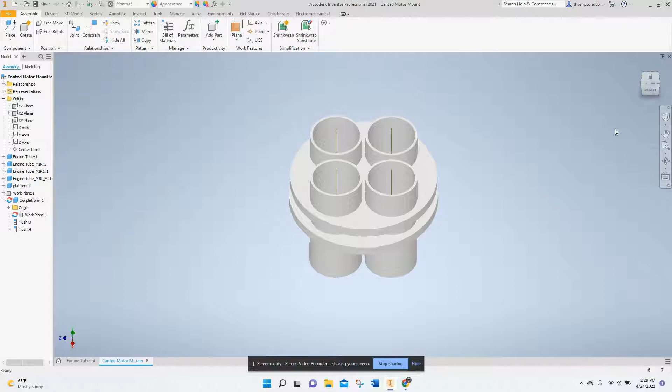Good afternoon, everyone. Today I'm going to show you how to construct your canted or non-canted engine mount.

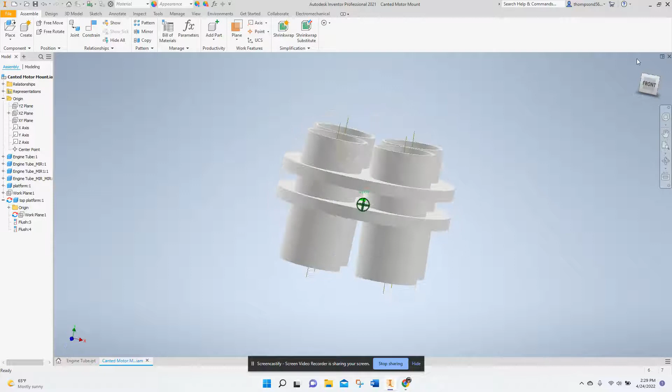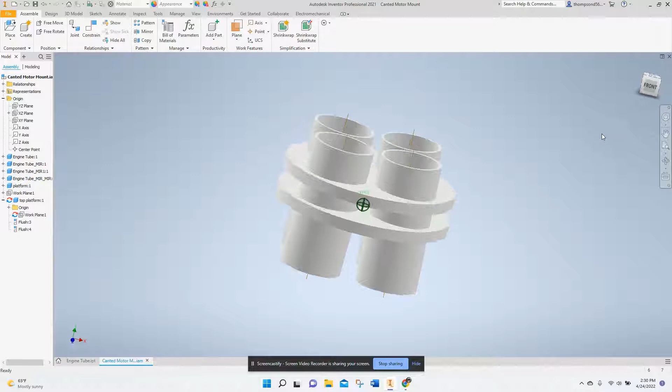This is just one potential layout. Yours doesn't have to look like this one. Notice these motors are canted in this direction, and my two platforms are kept close together, though they could be spread out as far as you want, and spreading out is probably better than close together. But in this case, I wanted the majority of my rocket motors outside of my rocket, which can have the advantage of being a bit more stable with the center of pressure lower. But it also increases the size of the fins, because they have to be up off the ground in order to launch. So, just one possible configuration.

You can create yours in any configuration you want, using basically the same steps.

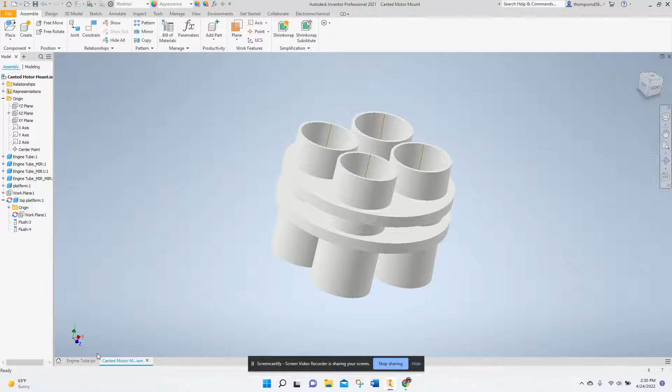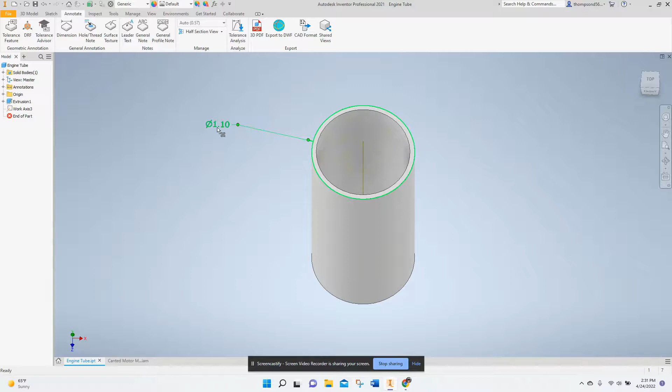I've already created my engine tube as a part. Notice it's completely hollow. I made sure it was 1.1 inches wide on the external diameter. To double check your measurement, you can add a dimension on the outside circle and make sure it's 1.1. The internal dimension I used was 1 inch, so my wall thickness is about 0.05 inch. That's how you can double check and make sure it's the right diameter.

I'm going to get rid of that so it's not in the way. You're going to open up a new assembly: file, new, and then click on assembly.

You're going to want to place your rocket engine tube so that it's symmetrical. I'm going to flip over my view cube so it says top, then go to the side panel and make some of my planes visible so I can see where the origin is and place my tubes in symmetry around the origin.

So I'm going to place the first tube. I'll go to place, and I named it engine tube, so I'll look for engine tube and open that. In this case, I'm going to place it right in the middle. Oh, I need to zoom in a little bit because it's not letting me exactly place it in the middle.

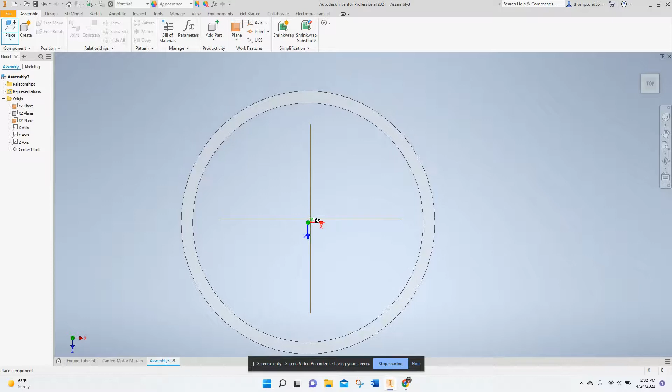Why not? No, I'm going to place it and then move it. All right, then I'm going to escape because I'm only going to place one at this point in time. I'm going to edit this one so I have it exactly in the middle.

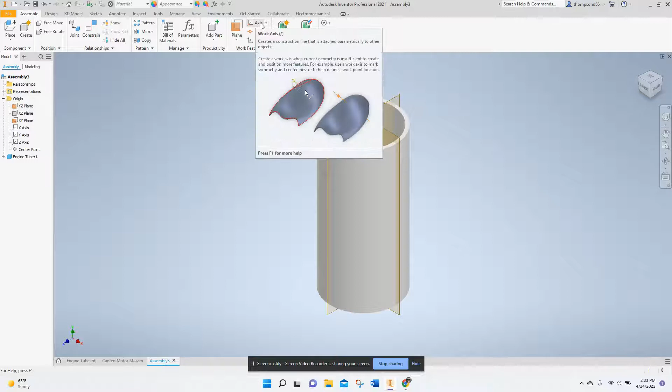Now, notice I kind of eyeballed it. There's a way to add an axis to help you with placing things. If we go over here... actually we can do it in assembly. See this toolbar that says axis? You can click that, and notice I highlight the work axis here in the very center of the tube, and I can place that work axis there.

Now, when I look at this, I guess it's easier to see from an angle, I can make sure that axis is right in the middle of where those planes are. So it helps with lining things up.

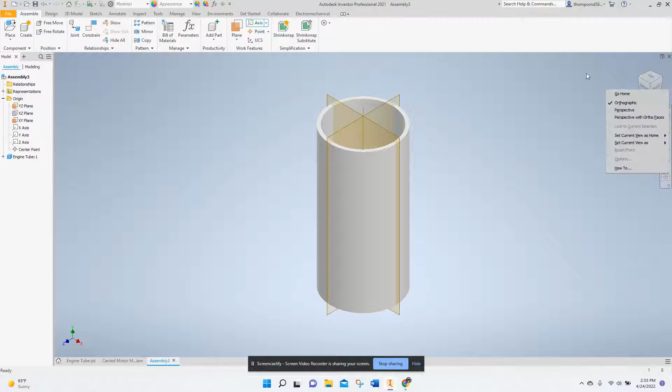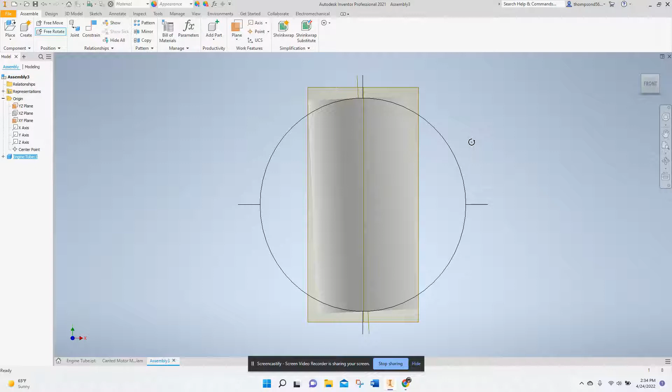Also, if I go to cant this, if I change it... if I'm looking at it from the front and I want to free rotate this motor mount so it's canted, I can look at the difference between my axes and my free rotate, and that gives you a little visual of exactly how far you're rotating the engine mount. So I'm going to undo that, because this one I don't want rotated.

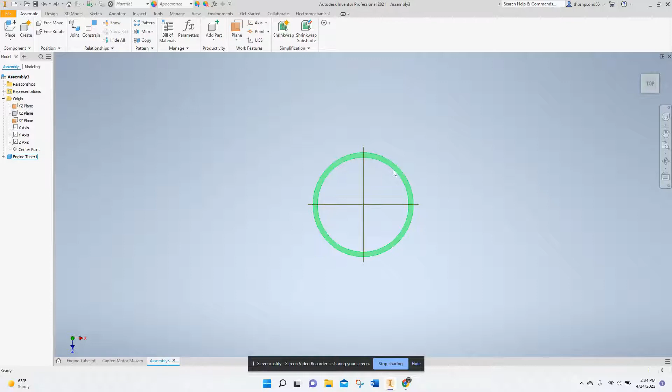And I'm going to go back up to the top view, and you can see this one's right in the middle. Now, let's say you decided you wanted the version with one in the middle and three around the outside edge. Now that I've got this one in the middle, I can place the other engine tubes around it.

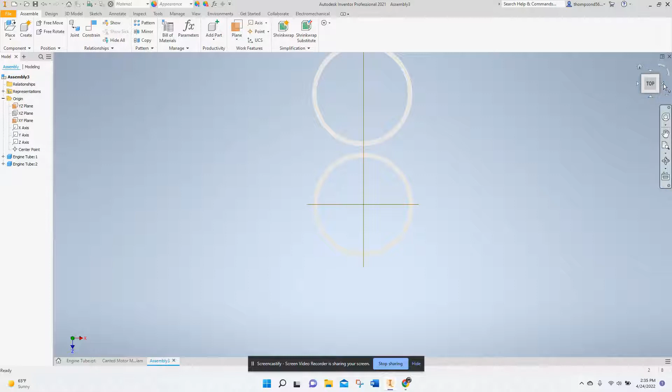So I'm going to place this one to the top, and then I'm going to cant this one just to show you how to cant it. I'm going to look at this from the side, and remember, you want the top facing in and the bottom facing out.

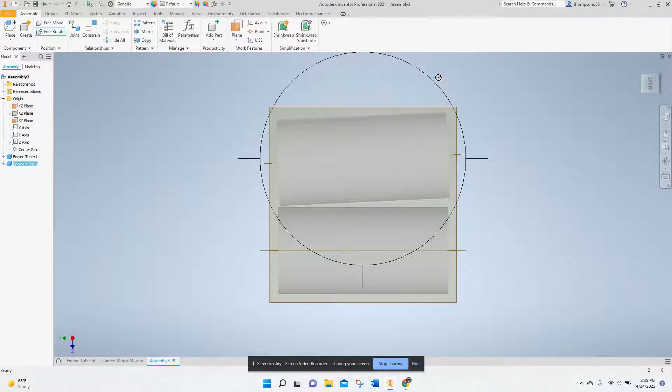So I'm going to free rotate this one. I want it canted just a little bit into the top. Then I'm going to free move this one so that inside edge is about the same as the center one.

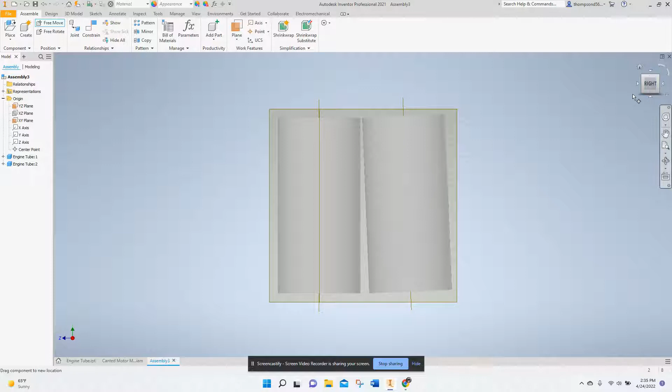Okay, then I'm going to look at this back from the top again. Notice that this one is slightly canted in. All right, so now I'm looking at it from the top.

There's a way to copy objects -- we've used mirror before, but there's also a way to do it in a pattern. So this time we're going to do it in a pattern, and pick the component we want to copy. Then we're going to select this circle pattern -- we don't want a square pattern, we want a circle pattern.

We want it to rotate around a point, and that point is the center point here. If it lets me choose the center point -- it's not. So I'm just going to click the center point here. Maybe not. Why is it not letting me select that base point?

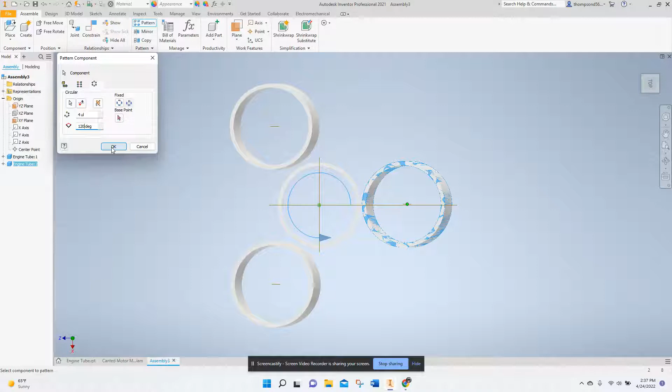There we go. Now this is making 4 of them, but I don't want 4 at 90 degrees, I want 3. So if I divide 360 by 3 times, let me pull up my calculator. 360 divided by 3 is 120. So I want them every 120 degrees instead of every 90. I'm going to put 120, and notice that gives me the rocket engines around the middle every 120 degrees.

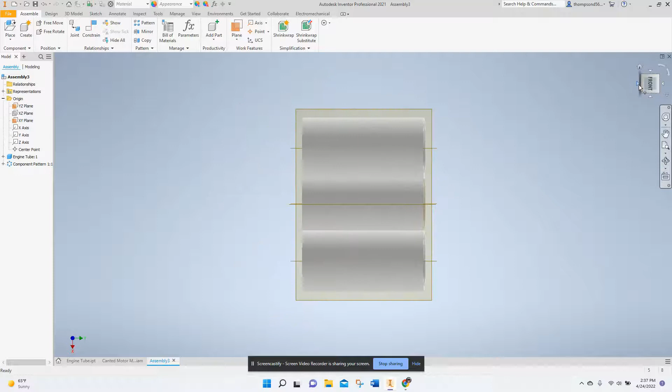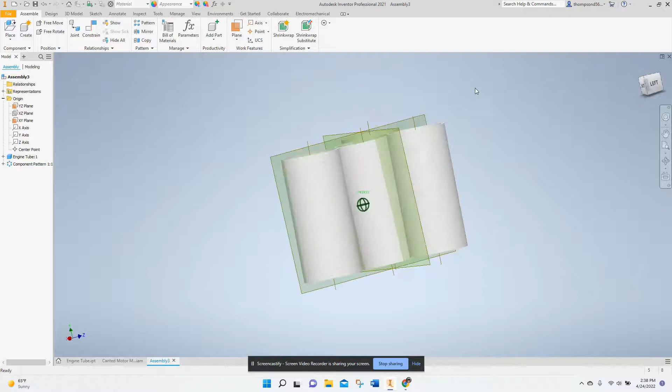Now the problem is because I already canted this, they're all canted in exactly the same direction. So if I spin it around, they're all facing the same direction. Since I made this one towards the center, they're all facing away from the center. So you're going to have to place them and then free rotate so that they're facing the direction you want.

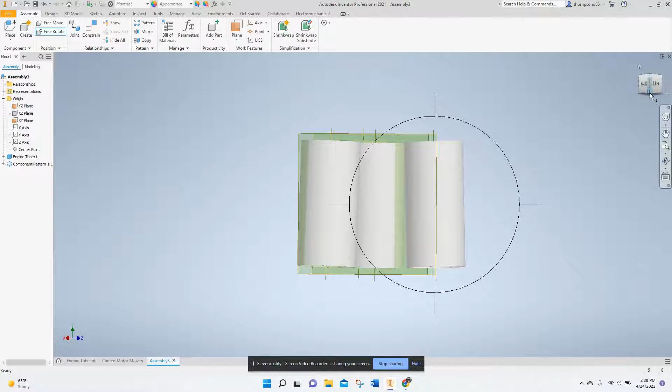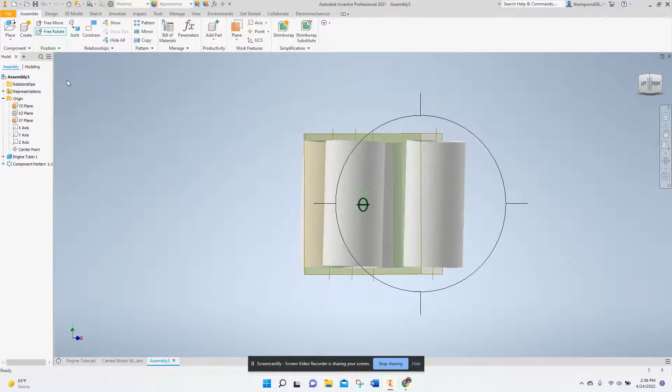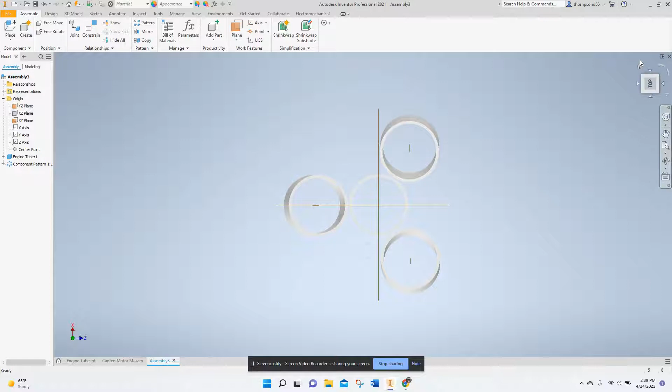So I messed up there, sorry guys. I'm going to fix that here. Okay, that looks good, now I just need to fix this one. I'm going to free rotate this one. Actually I need to get it more towards the side, so I'm rotating it into the middle. Notice how I'm flipping it around to make sure I'm not actually touching that first one. Okay, now we've got them canted into the center the way we want.

We'll go back to that home view and you can see how they're all facing in. Now you don't have to cant them, you can leave them straight up and down, and you can use rectangular, in the same way I just did circular, to put them in a square or any arrangement you want.

Okay, so here's the tricky part. Now that we have these in the organization we want, we have to put the cross pieces in the big circles to hold them in place and glue all of the engine mount into your rocket. So first we're going to need 2 work planes, one for each of the surfaces you're making for those round circles. I'm clicking on work plane and clicking offset from plane. We want them offset from the horizontal plane.

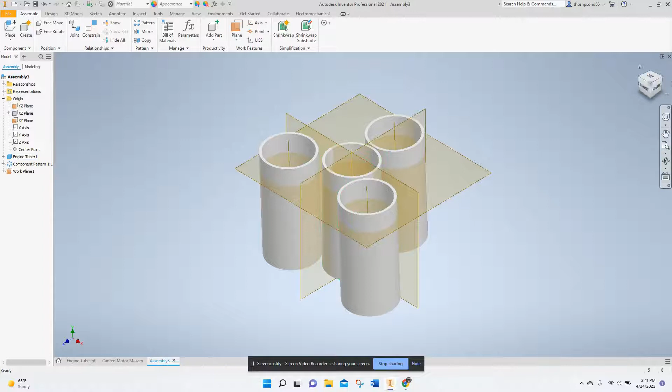This horizontal plane is in the middle and I want to move it up to the top-ish part of the tubes. Now I made my tubes 2¼ inches long, so it's going to be 1⅛ from the top right now because it's in the middle. So I'm going to move it up 0.75, that will give me about 3/8 inch from that top surface. And again, you can do whatever distance you want. So now you see I have that first work plane at the top.

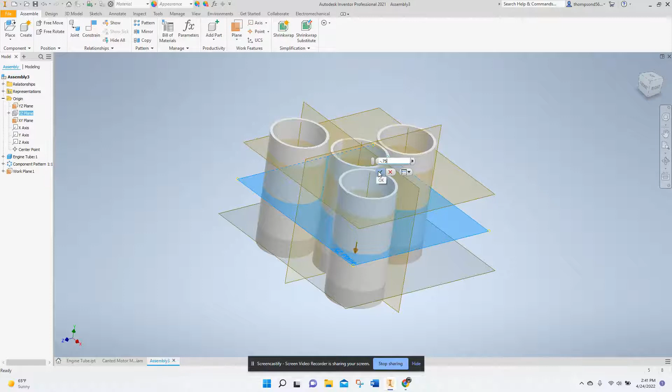And then I'm going to do the same thing again, only this time offset the plane downward. The way we offset it downward is by putting a negative 0.75. If I use a positive, it goes towards the top; if negative, towards the bottom. So now if we look at it, you can see I have 2 work planes, one close to the top, one close to the bottom.

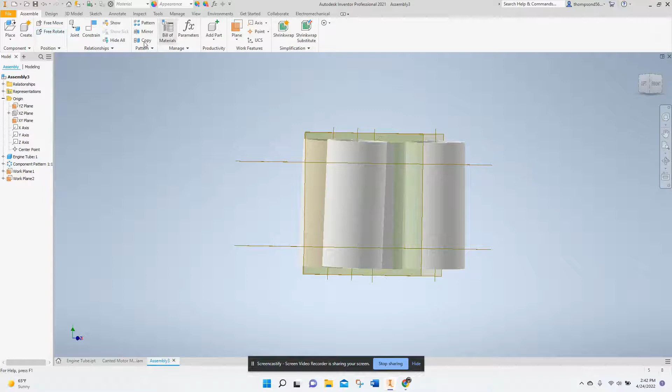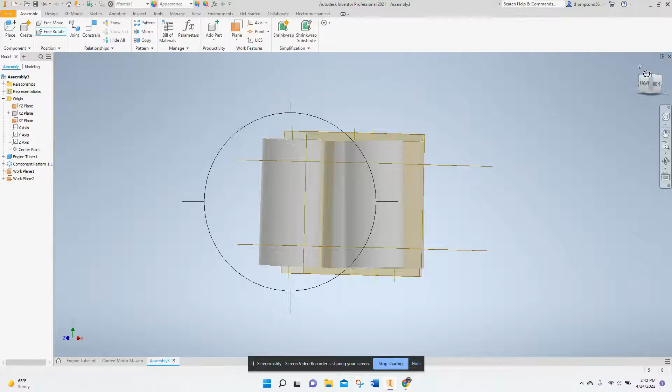I might need to recant this one right there, it's still kind of facing a little wonky, so I'm going to fix that real quick. You definitely want your canting perfect before you do the next step, because otherwise it will mess up the cut lines. Now to a step we've never actually done before. I'm still not happy with that one, hold on guys, sorry, this is where you get to see Miss T's OCD. It still needs to go in just a titch, there we go. Okay, I think I'm happy with it now.

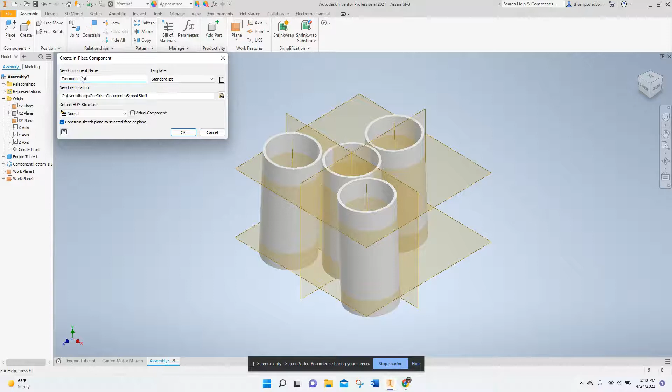Okay, so here's something we've never done before. We're going to go over to this block that says create and click on it. We're going to give this new part a name because it's literally going to make us another part, so we'll call this one top motor platform, because once you start building your rocket you may end up with some other platforms. Then I'll see how I have this new little part icon. I've got to click on the work plane I want to make that new part on. Now notice I'm automatically in 3D modeling mode, I've got access to all of my different tools.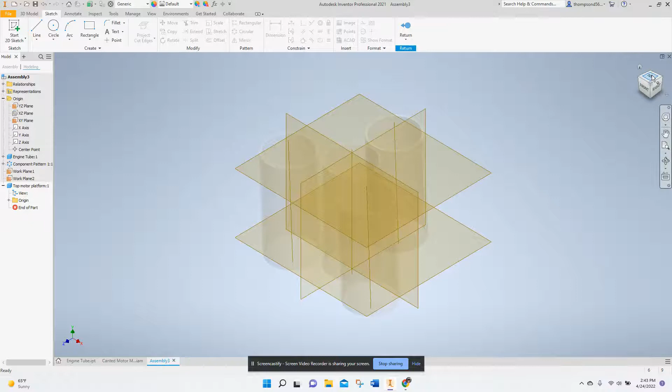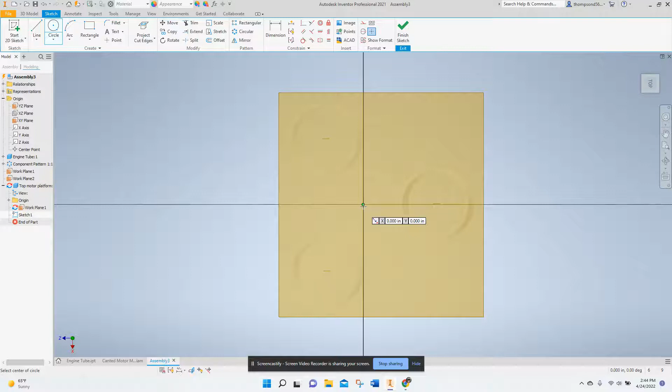Now we're going to create a circle. Whoops, sorry, need to open, it was not open to my new sketch like I thought it was. Okay, now we're open to our new sketch. I'm going to create a circle, and the center line is already over my center rocket motor tube, and I'm going to create a circle that's just big enough to encompass all of my engines. In this case that's about 3.3. Now we can go back and make this circle bigger, but this will at least give me the minimum measurement I need for my body tube.

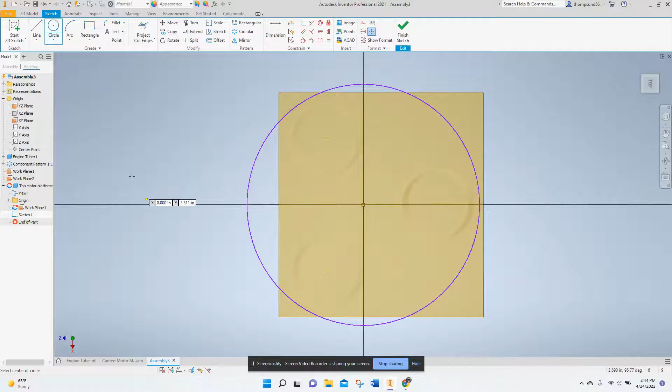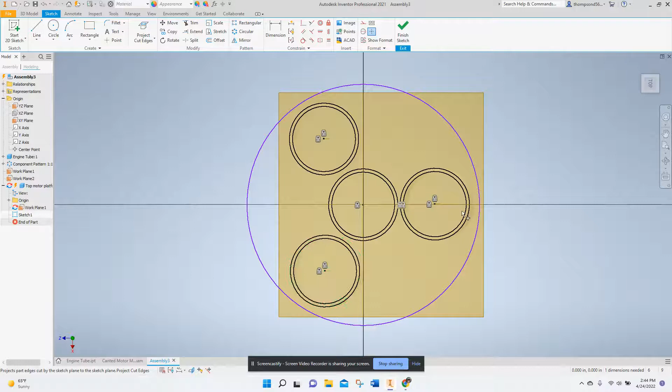Now I'm going to go up here to where you see project cut edges. I'm going to click on that, and then click on each of the 4 body tubes. So now it's projecting the geometry of where this work plane cuts through each of those tubes. If I look at this, notice that those circles go along where the tubes overlap this work plane.

Then I can go into the extrude, and my profile that I'm going to be extruding is all around the outside. I don't want to click on the insides. I don't want to extrude the tubes. I want all the area around the tubes. So I'm going to click on that.

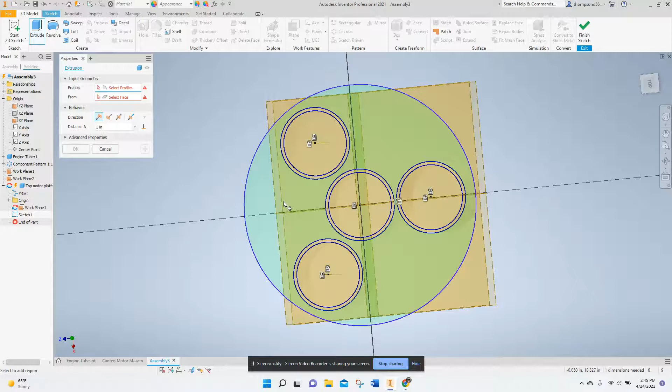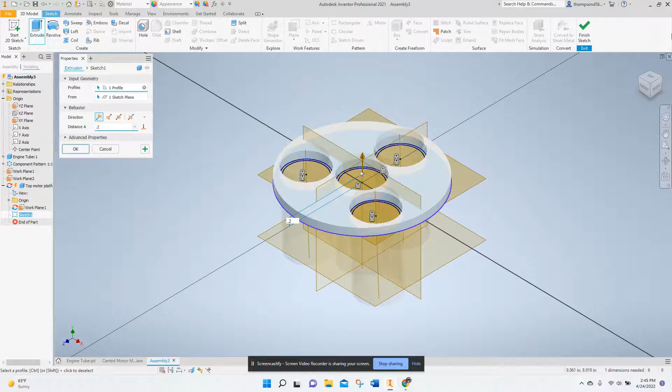And again, I need to pick which direction I'm going to extrude it. So I'm going to extrude, the thickness of the cardboard is 0.2. If I want to extrude it upward, it'll go like that. If I want to extrude it downward, it will go like that. It just kind of depends on how much of that engine mount you want sticking out. So I'm just gonna pick this direction. Doesn't really matter, I'm just doing it as a demo.

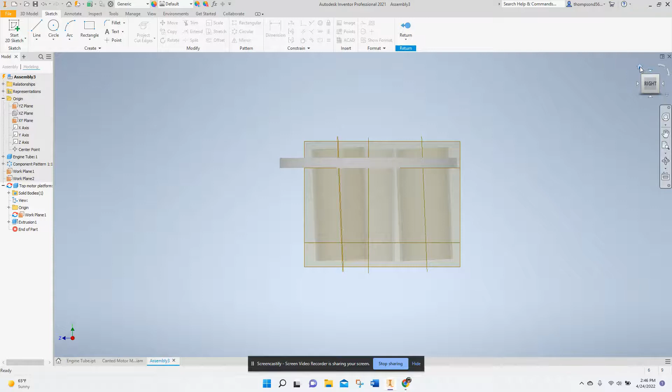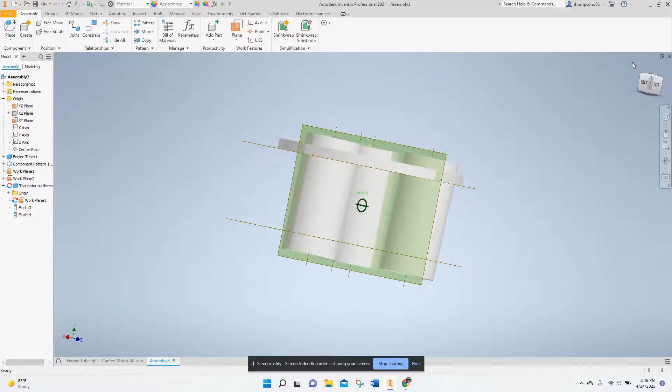So now if I go back here, notice that part now has a hole where that engine mount is. And if I click return, it is now its own portion of my engine mount. Kind of feel like I don't like where that one is. It still looks like it's pointing outward, so I probably should have fixed that one before I made it.

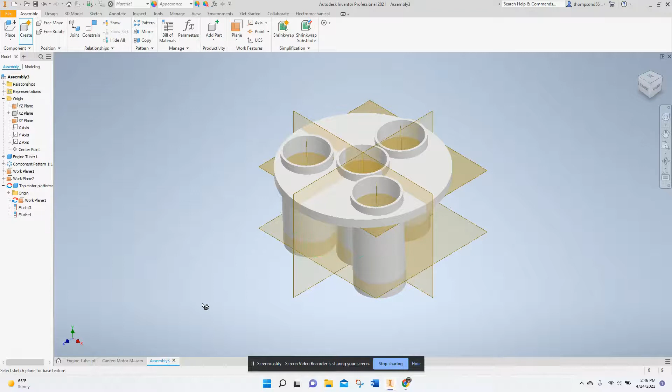All right, you're gonna do the same thing again. This time on the bottom one, you're gonna again click create. You're gonna give it a name, bottom motor platform. I'm gonna click OK, and then I've got my little icon. I'm gonna click that work plane on the bottom this time. I'm gonna start my sketch, and do the same thing.

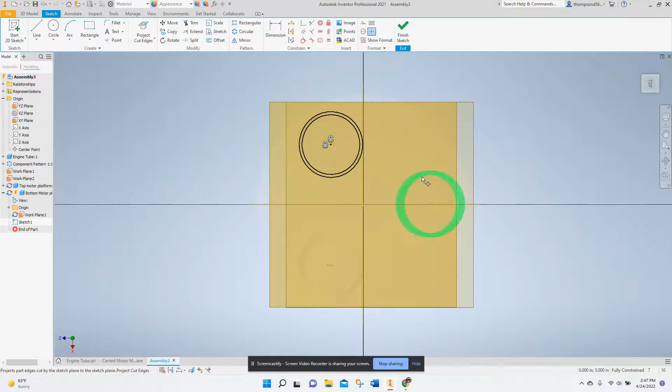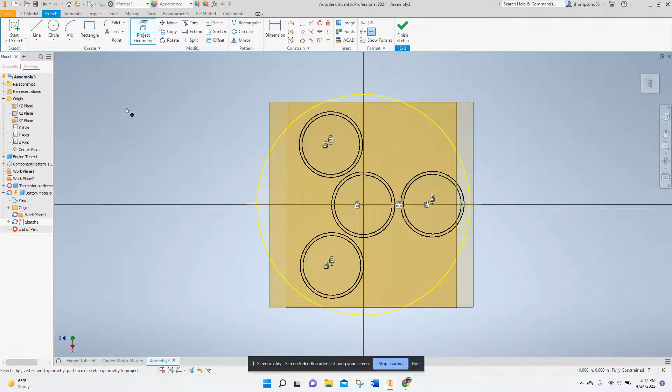This time I'm gonna project my cut edges first. And then I'm going to go back up to project geometry. I'm going to pick this outer circle. So now I've got all the geometry that was there. The only part that's cut through are those inner circles. So that's why I had to go up and change to project geometry instead of project cut edges, in order to get that outer circle.

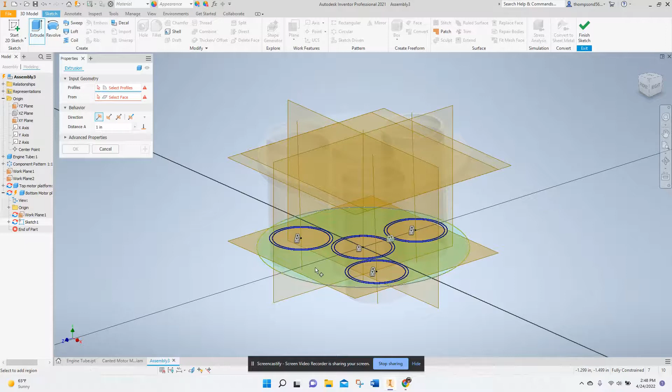And again, I'm going to do my extrusion, pick that space around. Oops, what just happened? I just lost something. Sometimes because I'm doing this on a weird touchpad instead of with a mouse. All right, and I'm gonna make this one go the other way as it goes outward. Go OK, and then close my part.

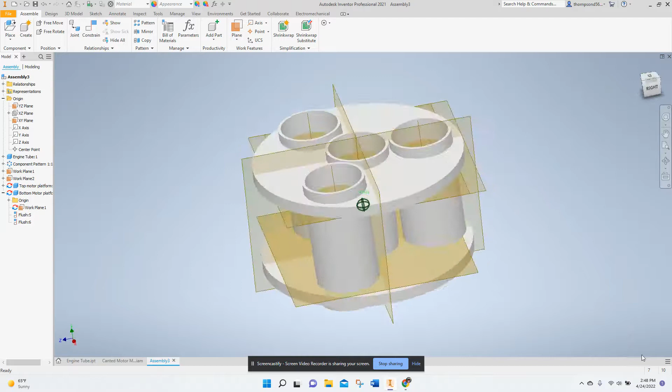Now you'll see I have my full engine mount. Now sometimes you guys might be like, got all these work planes there. It's kind of distracting. How do I get rid of some of that stuff?

So remember that you can make anything visible to get it out of the way, or invisible. Make it visible to see it, or make it invisible to get it out of the way, by just checking or unchecking visibility. So I can take all of those work planes out of there.

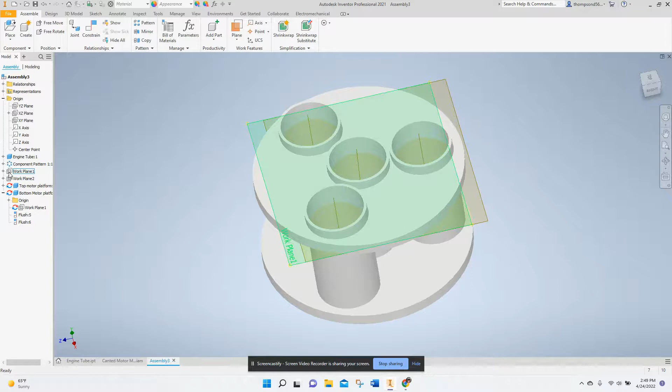I missed one. Nope, I made that invisible. Okay, why is that? Hold on, I missed something here. Anyway, so you can make anything visible or invisible to get it out of the way, to be able to see how your part is coming together.

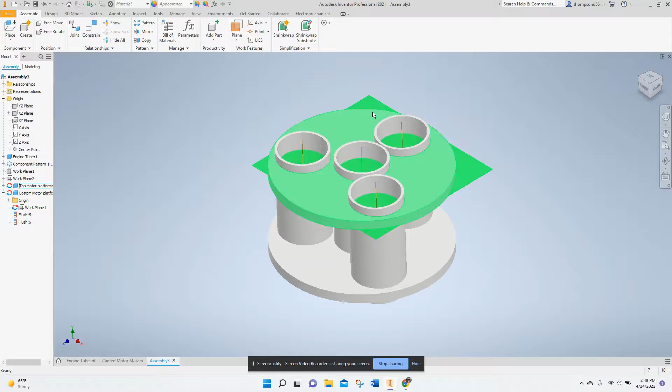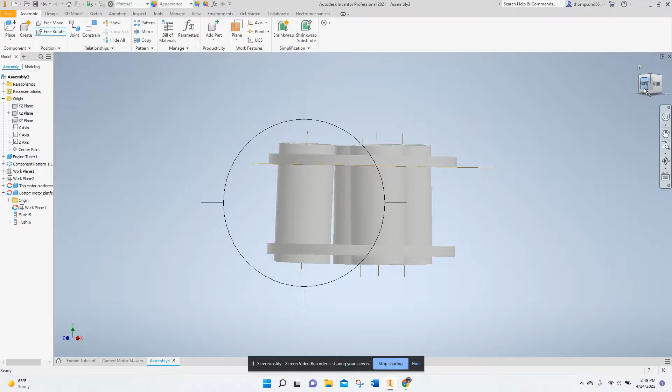Now let's say, for instance, this is good for just learning. I am really unhappy with this body tube over here. It's still not the direction that I want. I can click free rotate. I can still rotate that.

And I can look around, make sure that I'm happy with that rotation now. And it should update where the cut lines are. So it did not give me any errors or anything. It looks like it auto updated where those cut lines are. So once you import geometry like that, it will automatically update the geometry.

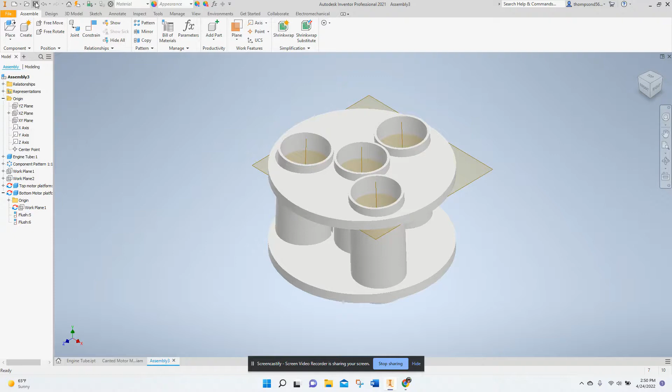Now, don't forget to save your file. So file, save as, make sure you're picking your H drive. When you click on this, you should be going all the way to the bottom and you'll see your H drive. Make sure to give it a really good name that's descriptive with your name in it, because eventually we're going to be making cut files out of this so that we can cut those circles.

This is my second one because I did one for practice. So I'm going to call it... I'm going to say, okay, yep, all of those files that were updated, I want to incorporate those updated files. And I say yes, and I say accept, and there we go.

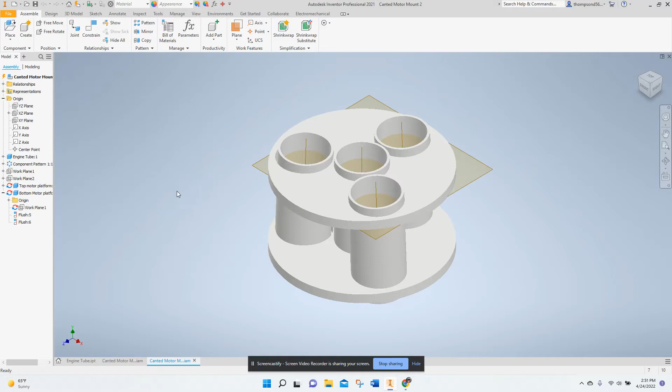So there you have it, a canted motor mount, ready and waiting to get circles cut and printed. And there you have it.